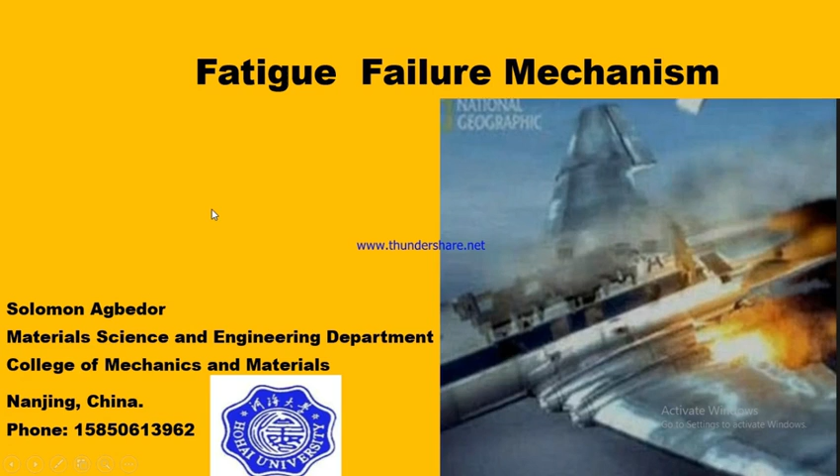Today I'll be talking about this particular topic of fatigue failure mechanisms in materials. My name is Solomon Agbedor. I'm a graduate researcher in Hohai University College of Mechanics, Department of Material Science and Engineering, China.

Today, we'll be looking at why scientists look at fatigue as a failure phenomenon, and why we have to study failure in materials. Then we'll look at the effect of fatigue compared to static loading, fatigue failure causes, and the stages of fatigue. Under this section, we'll look at crack initiation, crack growth, and the final fracture of materials or metals.

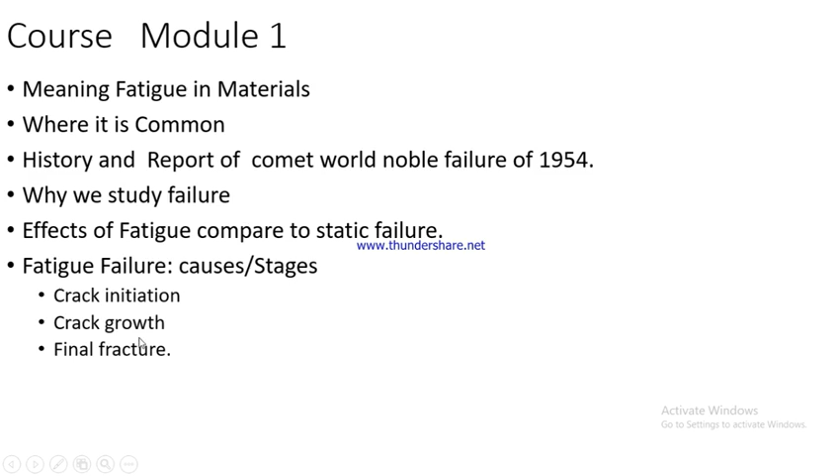Then we're talking about fatigue. When defining metallic fatigue, failure in metallic components has to do with the material being subjected to fluctuating loadings, variable loads, alternating loads, repeated loads, random or cyclic loads. All these are equal to dynamic loads that occur in materials over a long period of time, and which occur below the yield strength of that particular material, causing failure.

The places where fatigue is basically common, you can see bridges - this is a bridge now - engineering infrastructure, automobile cars, engines, and diesel or marine diesel engines too. So these are places where fatigue is basically common.

Like this bridge we are seeing here now - this is the Golden Gate Bridge - without the moving vehicles, it operates on static loads. But by the time vehicles start moving on it, it started experiencing dynamic loads, which can cause fatigue.

Like the diesel engine we also have here, the moving parts also cause dynamic loads to occur, which can also lead to fatigue. That is the movement of the pistons, then translating energies to the crankshaft, and all these combined together can also lead to fatigue.

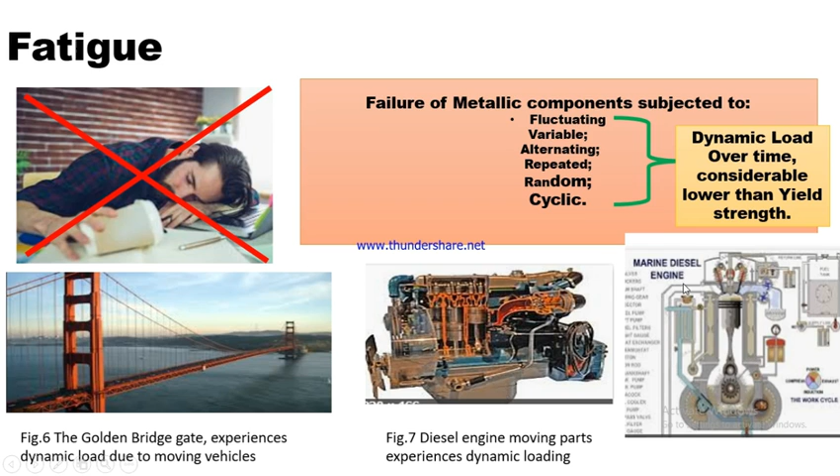Similarly, in marine diesel engines, the up and downward stroke of the piston also leads to the rotation of the crankshaft, which can lead to dynamic loads that will eventually cause fatigue to occur and failure to occur.

Now let's look at the history of fatigue. The first scientist to basically work on fatigue was Wilhelm August Julius Albert, a German mining administrator. He was the first person to propose a theory of fatigue in metals in its time.

After him, some scientists worked on fatigue, but they never took it to be so pertinent, so they treated it with little relevance in material design. But the crash of BOAC Flight 781 in 1954 actually attracted the attention of scientists and researchers to basically look at fatigue as a failure mechanism.

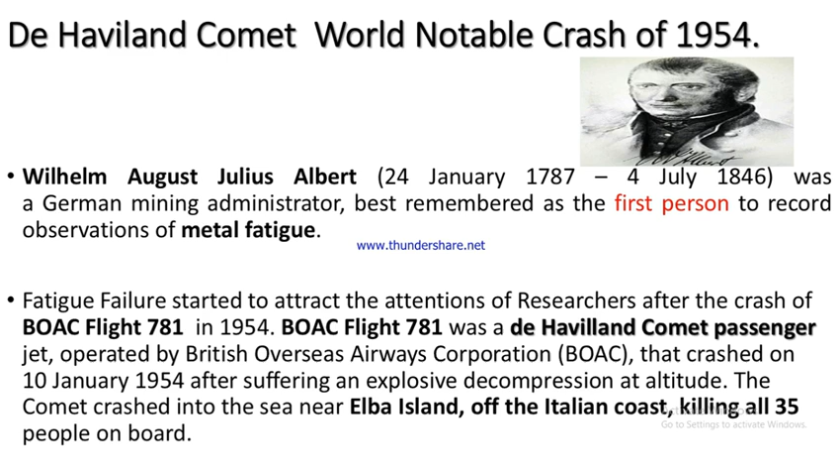This crash took place in Elba Island off the Italian coast, which killed 35 persons on board. In the next slide, I will be explaining to us the technical report of this BOAC flight in 1954, according to the way I researched it.

According to reports, the flight took place from Rome and was heading to London, at a level of 11,000 feet, which is a normal altitude in avionics. Then the plane was pressurized.

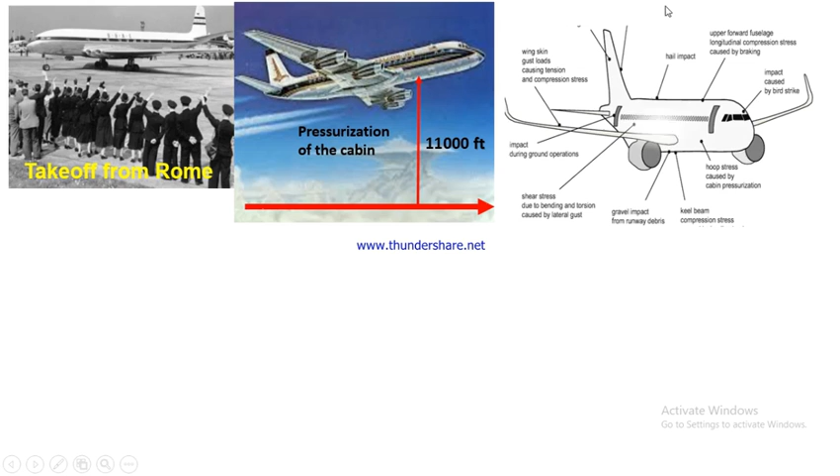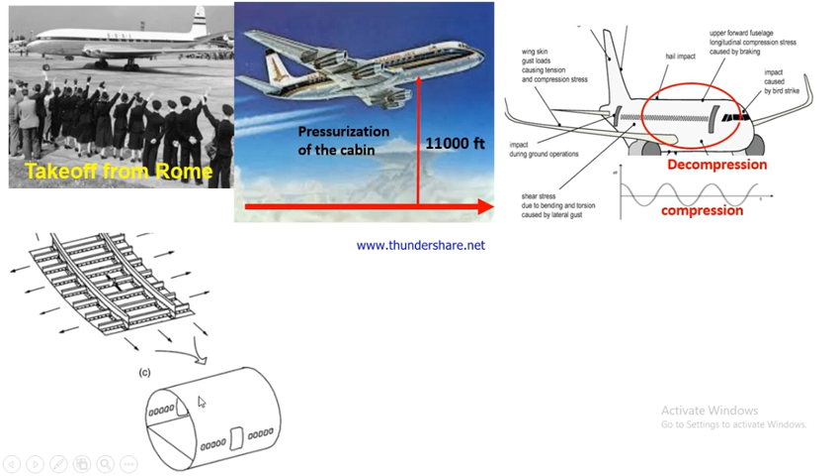This pressurization led to compression and decompression taking place at the fuselage of the aircraft, and this compression and decompression led to what we call cyclic or dynamic loading. This eventually made one of the windows undergo crack initiation and propagation that led to fracture on the fuselage, which eventually led to explosion of the aircraft, killing 35 persons on board.

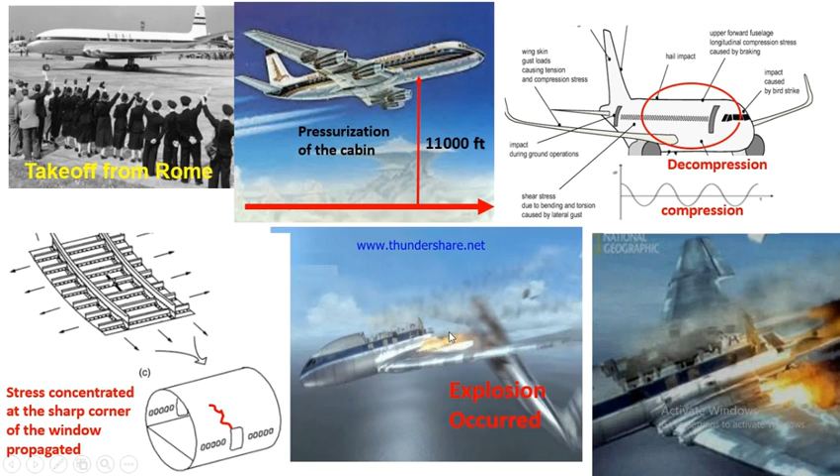After this crash, about 3 months later, another crash of the same airline took place. This actually caught the attention of scientists to look in depth at the cause of these failures in their products, and they later found out that it had to do with fatigue - that is where scientists started looking into fatigue as a mechanism.

Another big question we're supposed to ask ourselves is, why do we have to study failure? It has actually been estimated that approximately 90% of metallic failures has to do with fatigue.

And once failure occurs, it definitely leads to loss of lives, especially when lives are involved. Another part is that it also leads to reduction or stoppage of production. Once it happens in production lines, there will automatically be closure of the production lines and production systems, which will eventually have a reciprocating effect in economic losses. So these are the three important paramount reasons why failure in materials needs to be studied.

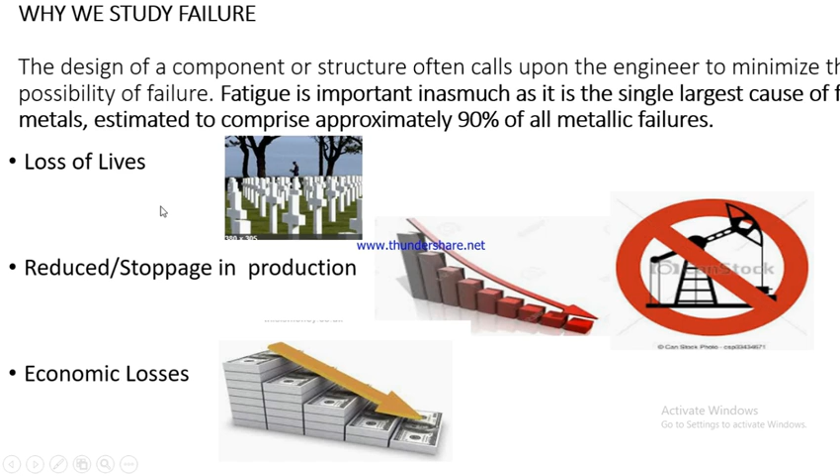Now let's look at the effect of fatigue compared to static loading or static failure. In static failure, deformation or yielding occurs, which we can see when failure is happening, and engineers can easily take cognizance and a proactive approach to it. Static loading leads to failure when materials are exploited at their yield strength, and we can easily see it occurring, giving us warning signs. We can see that the material is beginning to plastically deform, which we can easily take proactive measures to avert. So another thing about static loading is that the theory is well understood. We know definitely that if we exploit a material above or at the yield strength, it's going to plastically deform, which will eventually lead to failure or fracture of that material.

But in fatigue, it's not like that. The failure of fatigue is sudden and catastrophic. We cannot actually tell when it's going to occur. That is why the factor of fatigue has to be very carefully taken care of, especially in materials or mechanical designs. And the damage of fatigue is irreversible; we cannot reverse the damage caused by fatigue failure.

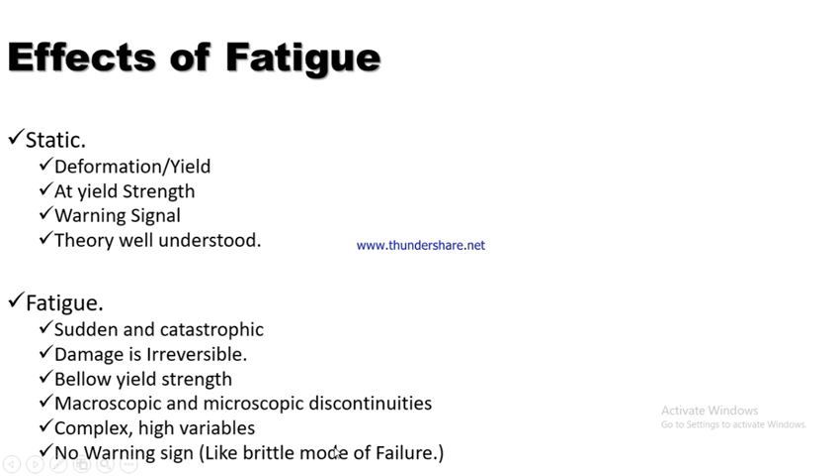We also look at the theory of fatigue being highly complex. If the theory were well understood, I believe fatigue would have been prevented from occurring in metallic materials. But because the theory is still not well understood, scientists have not come up with an idea on how to totally design against fatigue, because there's no way we can avoid fatigue in metallic components or mechanical designs. So there's no warning signal; it does not show us that it's going to occur. The failure of fatigue occurs like a brittle mode, so you will not see it, it will not show you any signal. There's no yielding, no plastic deformation. It will just occur catastrophically.

Now let's look at cyclic stresses. Like I defined, fatigue is a failure that has to do with materials or metallic components subjected to cyclic stresses or cyclic loading. The cyclic stresses could be axial stresses, or they could be flexural stresses, which has to do with bending. It could be torsional stresses, which has to do with twisting in the material, or sometimes these stresses could be in combination, with two or three of them active in the material at the same time.

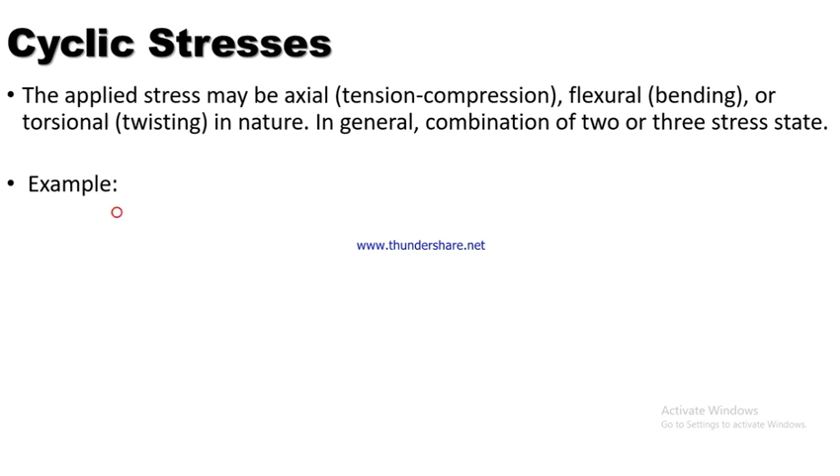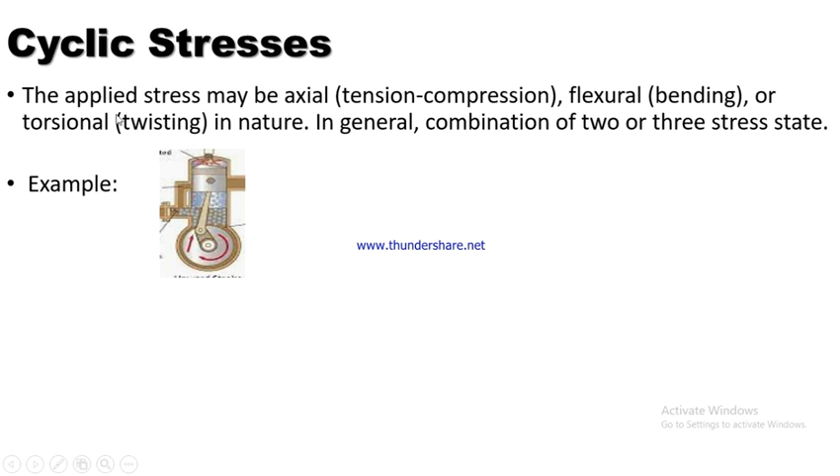So places where those cyclic stresses are highly paramount are, like I told you, the car engine or the diesel engine, whereby there is rotation of the crankshaft and the gear system. All this actually leads to cyclic stress, like what we have here now. You can see, like this one too, I will explain. Then we have the gear systems too.

The contact of gear systems can also lead to cyclic stresses. When we say the stresses are cyclic, we mean that the profile of the stresses is sinusoidal. You can see how the stresses are alternating from positive phase to negative phase over a long period of time.

That is what we mean by cyclic stresses. Let me use this diagram to explain. This is a car, and this is an automobile engine that has a crankshaft, a connecting rod, and a piston. When the rotation starts from here and begins to rotate, it comes back again to this place, and this is continuous.

So when the rotation starts from here and moves from here to here, we believe that the stresses in this material are stresses having to do with tension in the crankshaft. The stresses will be tension, which basically means they are the positive stresses occurring in this material. This crankshaft will be experiencing tensile stresses, which means they are tensional.

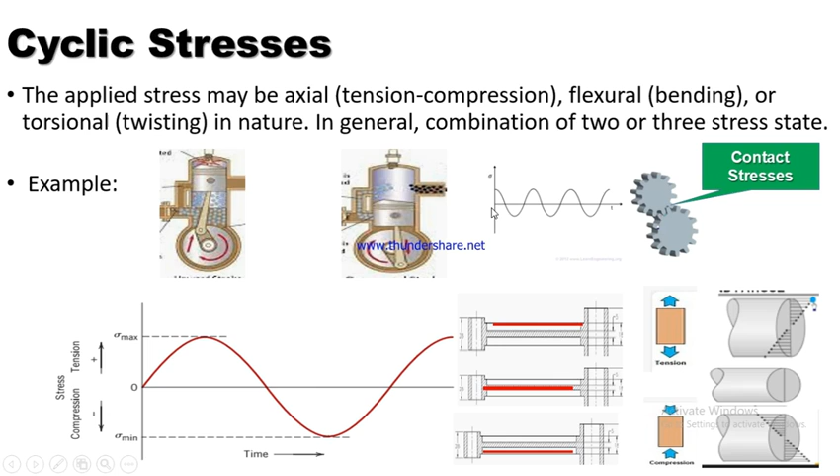That means it is a sinusoidal profile that occurs over a long period of time, which means the stresses are alternating both into positive and negative phase over a long period of time. Once this begins to occur in materials, then we have what we call fatigue.

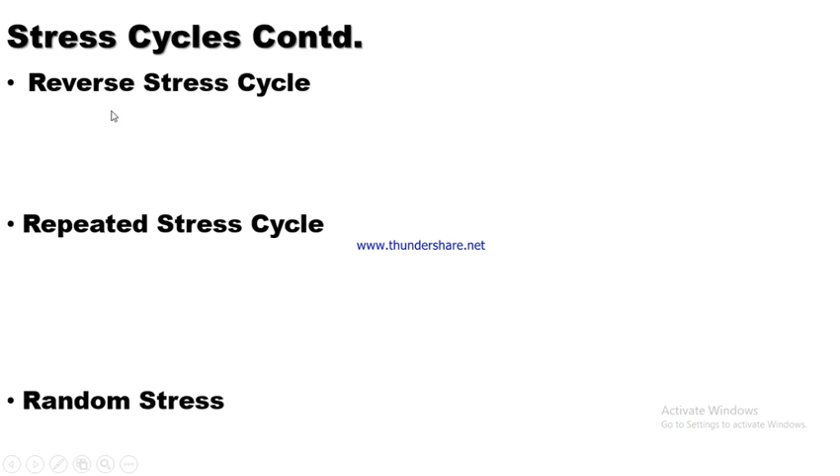Then we have types of these stresses. Sometimes we have what we call a reverse stress cycle, which has this particular diagram. When we say a reverse stress cycle in fatigue, we say that the positive and negative stresses, or the compression and tension forces, are equal, they are opposites. That is what we mean by reverse stress cycle. Reverse stress cycle always starts from the zero origin and then increases.

We also have what we call repeated stress cycle. Under repeated stress cycle, the minimum and maximum stress are asymmetric to each other, so they are not equal. And the stress never originates from zero. That is what actually leads to repeated stress cycle too.

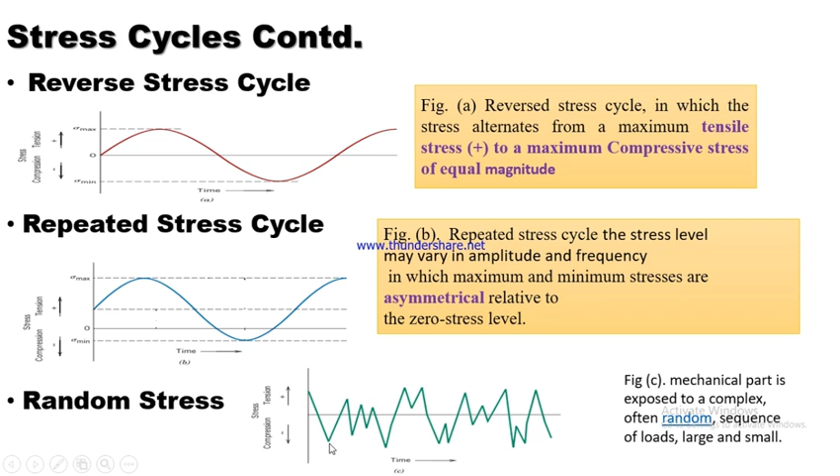We also have what we call random stress cycle, which is basically experienced in gear systems or mechanical systems. For us to resolve this dynamic random stress cycle, which has to do with multiple repetition of one phase of the stresses, we can actually resolve it into a reverse stress cycle or repeated stress cycle by using the rainflow method. For the scope of this work, that is another aspect on its own, and we are not going to look at that. The only thing I want us to understand is that it's also a type of stress cycle too.

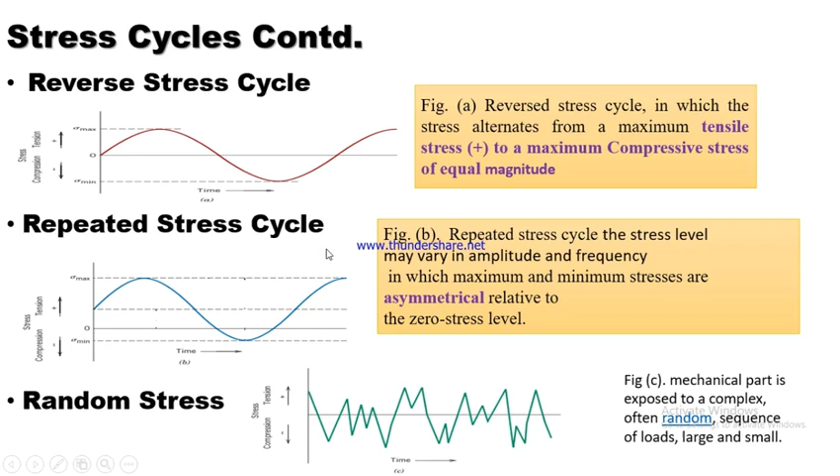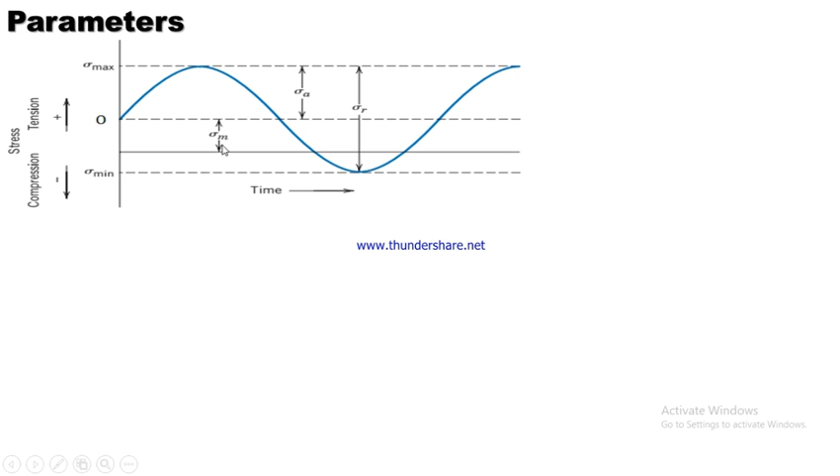When we're talking about stresses and cyclic stresses, there are some important parameters and terminology we need to get ourselves abreast with. Here we have a profile of a cyclic loading system. The first thing we need to understand is mean stress, and this is where we can locate it in the profile.

Mean stress is defined as the average of the maximum and minimum stress in the cycle. Mathematically, the mean stress is the maximum stress plus the minimum (compressive) stress, summed together and divided by 2, giving us the mean stress in the material.

Another thing we need to understand is stress range, represented by sigma r. The stress range is defined as the difference between the maximum stress and the minimum stress, which we can locate here. We subtract the minimum stress from the maximum stress to get the stress range of the cyclic stress profile. Mathematically, sigma r equals sigma max minus sigma min, and this gives us the stress range of the profile.

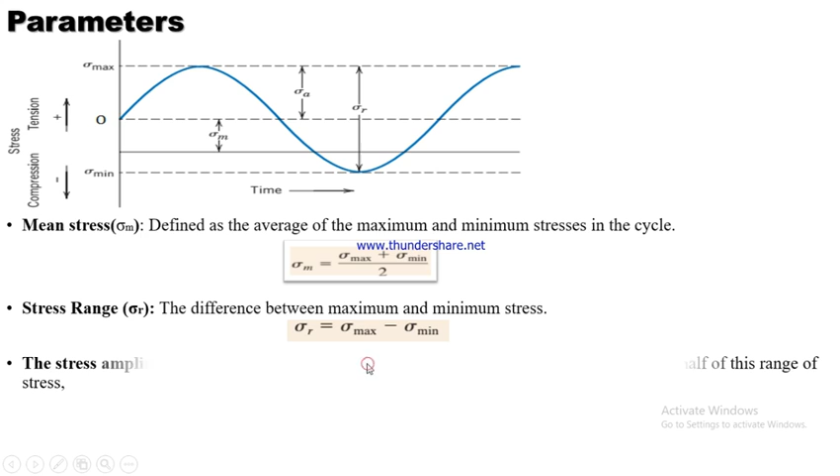Another parameter we need to know is stress amplitude. The stress amplitude is half of the stress range. Mathematically, the stress range divided by 2 gives us the stress amplitude—so half of the difference between the max stress and min stress gives us the stress amplitude.

Then we have what we call the stress ratio. The stress ratio can be defined as the ratio of the min stress to the max stress. This is represented with a capital R, and the min stress divided by the max stress gives us the stress ratio, which is represented here on the profile. All these parameters can be seen in the cyclic stress profile.

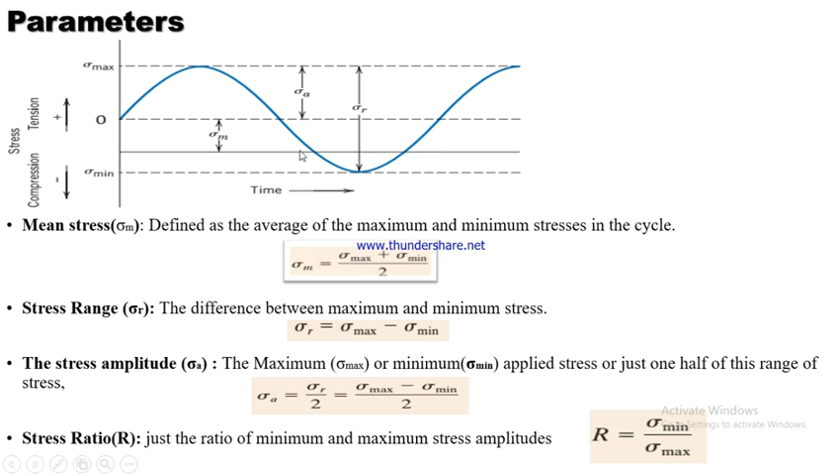Let us look at fatigue failure, the causes and the stages in fatigue. The causes of fatigue failure occur in stages. Before we can say a material has failed under fatigue, we have to look at the failure sequentially in various stages.

The first stage is crack nucleation or crack initiation, which can easily be caused by inclusions, flaws, imperfections, or voids in materials. There is no particular material free of voids or that is a perfect ideal material—all materials have flaws or imperfections. These can easily cause fatigue, even while we try to control them during the production or processing history of the material. During mechanical assembly too, we can sometimes incorporate these flaws into the materials or into the mechanical system.

It will also involve localized yielding. Localized yielding can also initiate fatigue, especially when flaws are present and the material is subjected to cyclic loading—localized yielding begins to take place.

We also have slip along boundaries, which can also initiate fatigue, especially since there are no inclusions when we try to avert inclusion in the processing history of the material, or design against them. We found that during usage of the material, or in service, when it is subjected to cyclic loading, slips begin to take place along the grain boundaries of the material, which leads to crack initiation and crack growth.

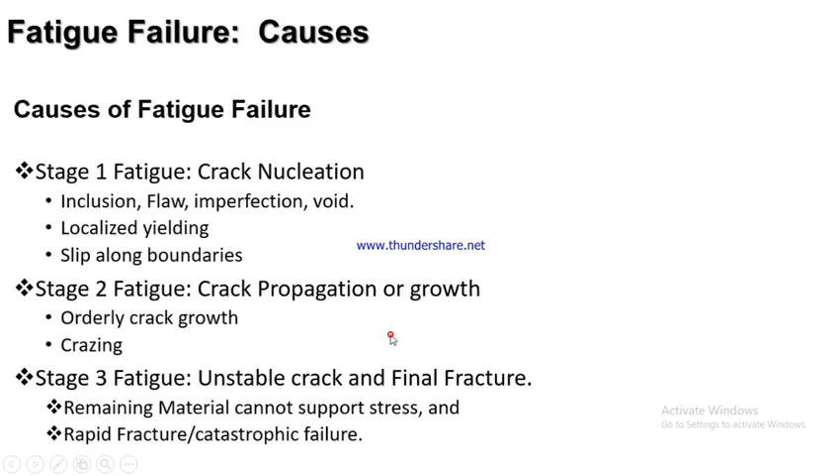Then we look at stage one, crack initiation of fatigue. Let's look at that.

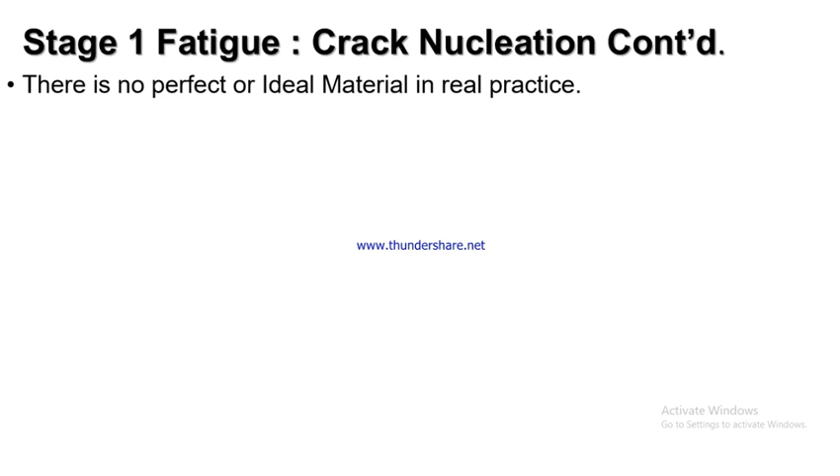Like I said, there is no ideal material, and a crack associated with fatigue failure almost always initiates or nucleates on the surface of the component at some point of stress concentration. Yes, we're going to look at that.

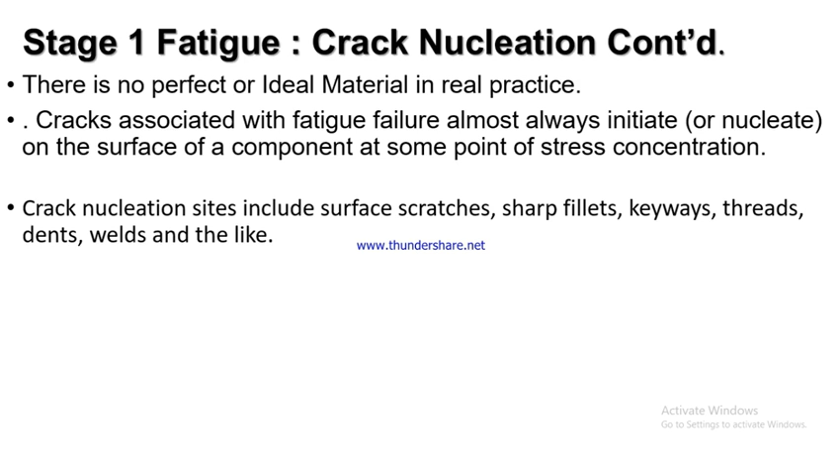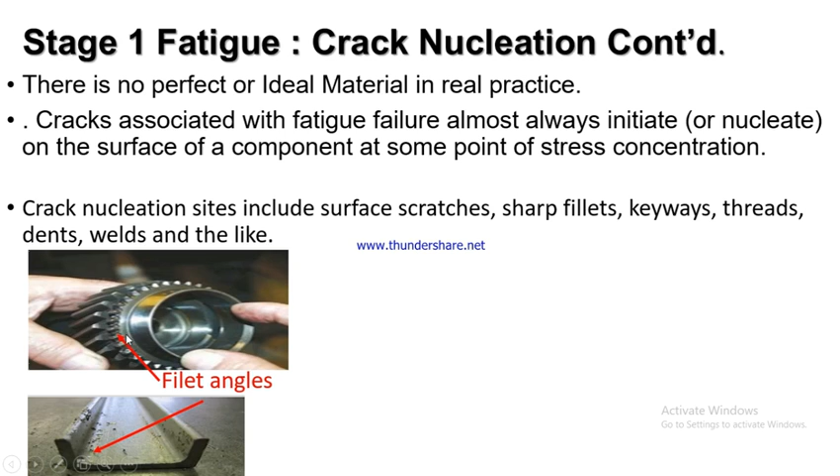We cannot have an ideal material, and sometimes when we try to avert voids or imperfections in materials during mechanical assembly, we try to put keyways or fillet systems in the material, which can actually cause stress concentration. Once those stresses are concentrated and the material is subjected to cyclic loading, the failure will begin to initiate along the stress concentration points of the material.

This is a gear system too. Crack can easily be initiated here because at these points we can have stress concentration, since these are the places where the stress will be concentrated.

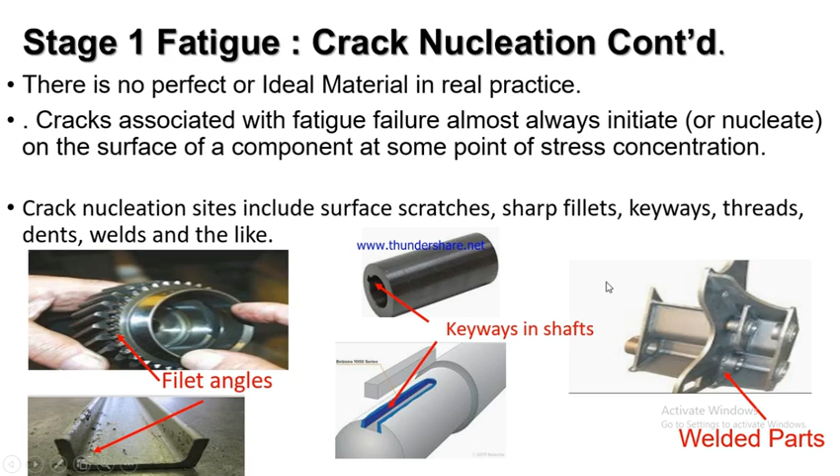We also have weld parts. You can see the places where systems or structures are welded together. We also have stress concentration at those points, which can definitely lead to fatigue crack initiation. So all these are what we call surface discontinuities in materials.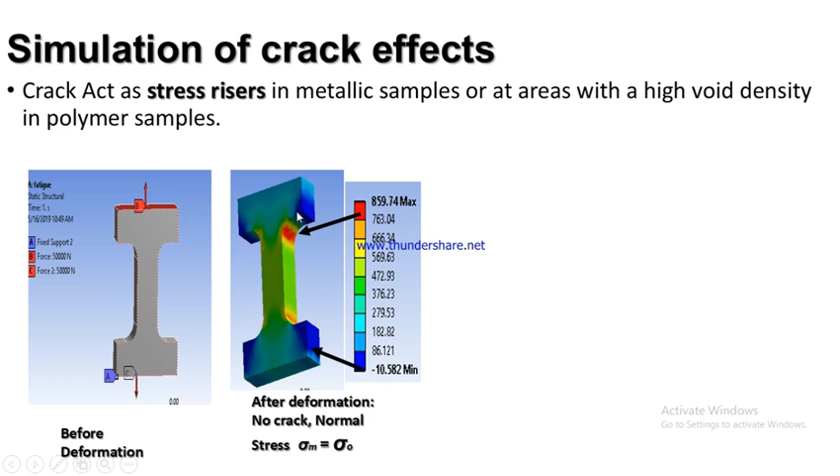But I tried to incorporate a notch into the system, and I found that the stress concentration migrated to this particular point because of the stress concentration factor. This means that the maximum stress occurring in this material now results from this stress concentration added here, which has to do with the stress concentration factor multiplied by the normal stresses attached to it, which makes the stresses here amplified.

When these materials fail, the failure will begin to start from here, because these are the places where the stress risers are located. So these are the factors of a stress riser, or stress amplifiers, in systems.

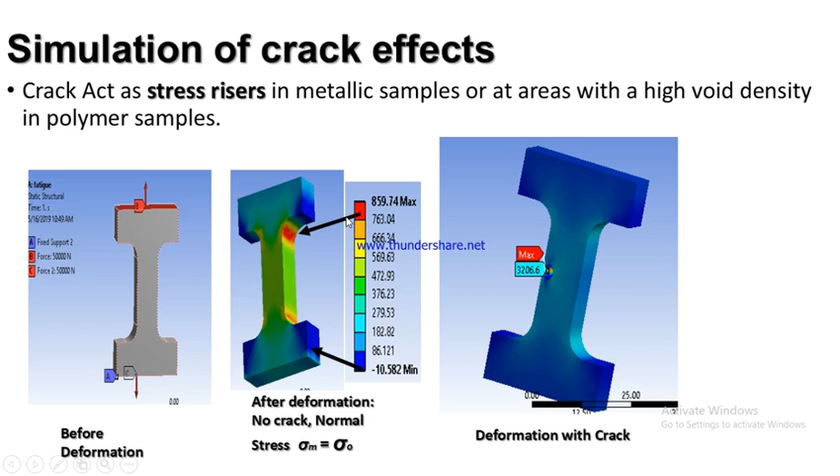Another thing I told you is that we have what we call local yielding. Once this material begins to experience dynamic loading, I want to use this diagram to explain. Once it begins to experience tension or dynamic loading, you find that local yielding begins to take place.

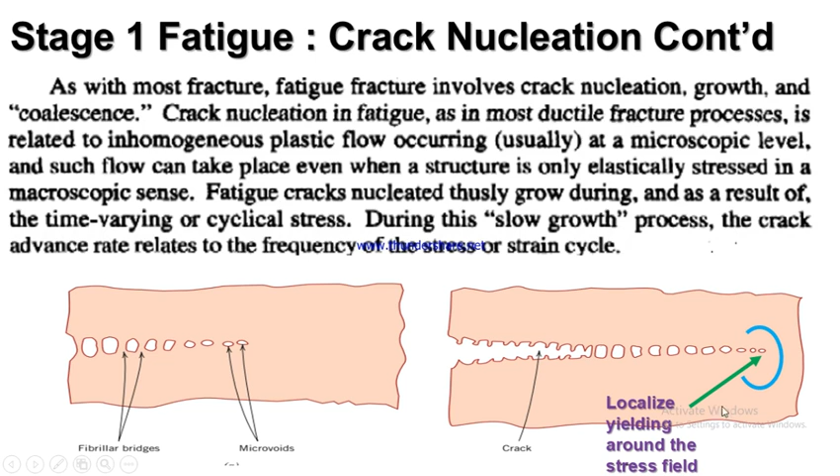I explained and put here that same coupon I simulated, and I tried to pull it in tension to see how the deformation is going to take place.

Let me play this video for you to see. As you can see, when I try to pull the coupon apart, you find that the stress... sorry, let me go back again. I want you to see that the crack can easily be initiated from here, which has stress concentration.

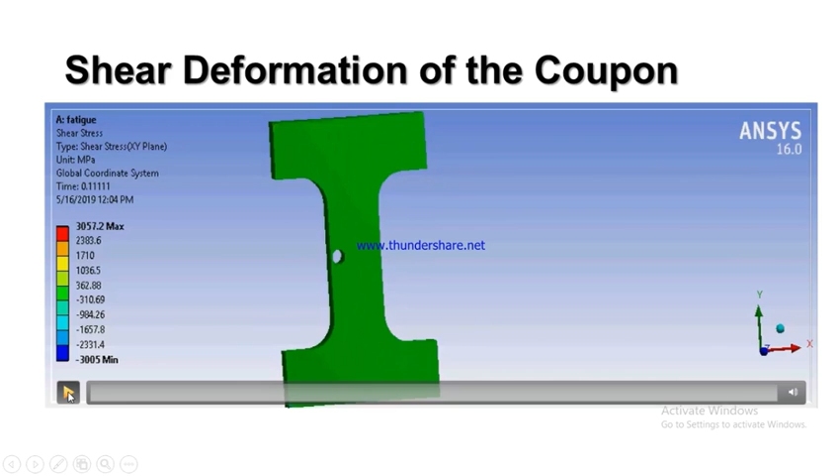So initially when we simulated this particular coupon, we found out that the stresses were basically concentrated at the fillet parts of this system, which has to do with the discontinued parts of the system. But when we now try to incorporate a notch to it, you found out all the stresses migrated to the notch, because the notch is acting as a stress riser.

Now let's look at crack nucleation. Let me go to the next slide to explain this to you. We may not have a crack initiation from an inclusion or imperfection in the material. Sometimes we have what we call persistent slip bands, which can also lead to crack initiation in the material.

It's generally accepted that the mechanism of metal fatigue is based on dislocation theory. Basically, the theory says that the atomic arrangement in crystals of a metal is imperfect and contains numerous missing atoms, and the missing atoms create gaps which cause massive stress risers too. So those dislocations that occur in the material, which can make the material plastically deform, cause stress risers or stress amplifiers in the materials too, which will definitely lead to what we call persistent slip bands.

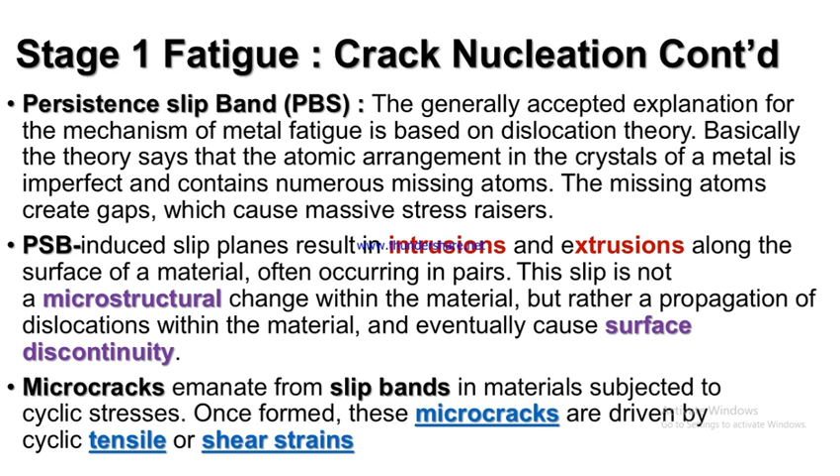This persistent slip band system induces slip planes and results in intrusion and extrusion along the surface of the material, which will lead to slip banding. We have microcracks that begin to emanate from the slip band system, which will lead to crack propagation. Crack propagation will definitely lead to rapid fracture, and we say that the material has failed under fatigue.

Let me explain with these diagrams that are here. We have what we call dynamic loading. This is a cyclic or dynamic loading. As it begins to occur in this particular material, the dislocations in the material will experience microplasticity. This microplasticity basically starts at the surface of the material, sometimes due to scratches on the surface, or there may not be scratches.

So when these dynamic loads take place over a long period of time, this will lead to microplasticity starting to take place. And this microplasticity will definitely lead to slip occurring at the surface, which you can see here.

As the stress increases, we definitely will have more slip bands begin to incorporate into the system. These are the slip bands, you can see them here. As you begin to increase the stresses on the system over a long period of time, more slip bands are increasing, and by doing so you begin to see that there will be a surface discontinuity. You can see the surface not being uniform.

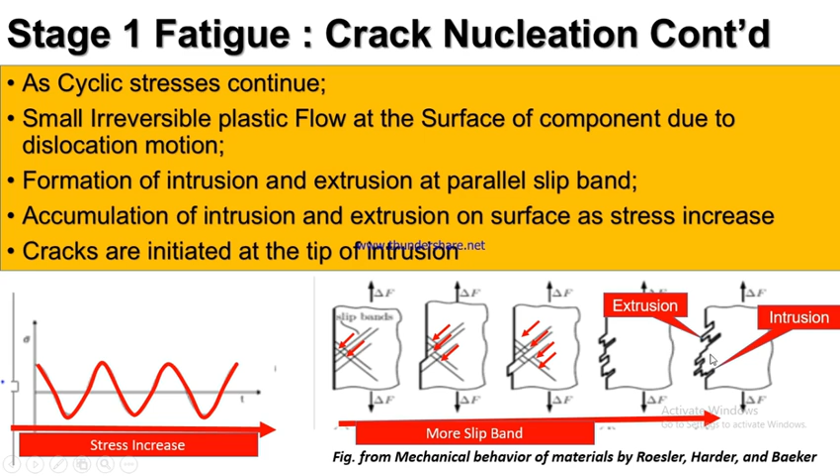At this point where the slip bands have now increased, you can see that there is a discontinuity at the surface of the material. As this continues to take place, we begin to see more slip bands taking place, and you can see there's a protrusion coming from the surface of the material. By doing so, we begin to have what we call surface intrusion and surface extrusion.

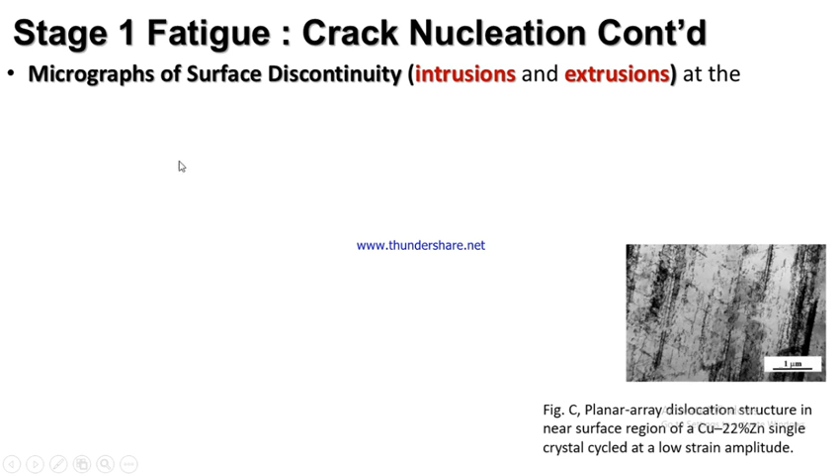We also use a micrograph to explain this to us. Let me put the micrographs here. Like we have here, you can see this is a micrograph showing an intrusion and extrusion taking place. This is an extrusion at the surface of the material, and this is an intrusion.

These are dislocations occurring in the material. These dislocations lead to slip bands taking place, like I explained in the previous slide. This is another micrograph too, showing an SEM image of slip bands. You can see this is a PSB, and this particular part is called intrusion. The part that goes inside is an intrusion, then the part that protrudes out is called an extrusion.

So all these can occur at the microscopic level. All this will lead to micro cracks being initiated.

When this particular material is subjected to cyclic loading over a long period of time, you begin to see cracks start to propagate.

This is also an inclusion in materials, which can also cause fatigue. This is due to imperfection in the material. These are particles in materials.

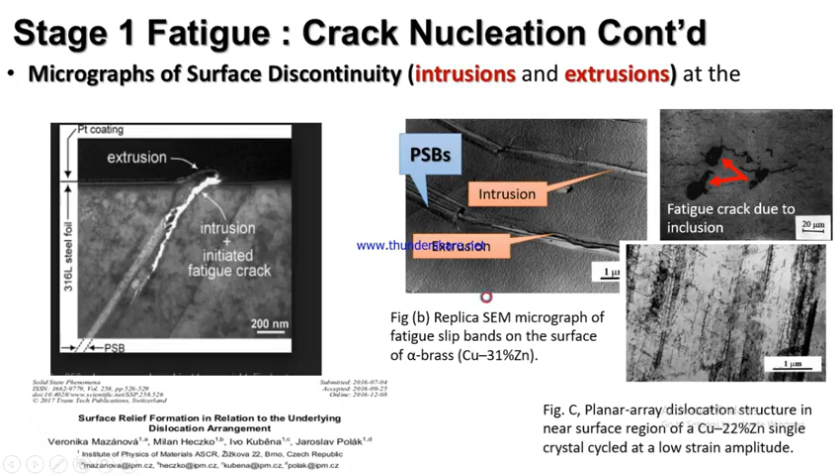Now let's go to stage 2 fatigue, which has to do with crack propagation and crack growth. Like we said before, once those cracks are initiated, for them to propagate or try to grow, there are other mechanisms associated with them.

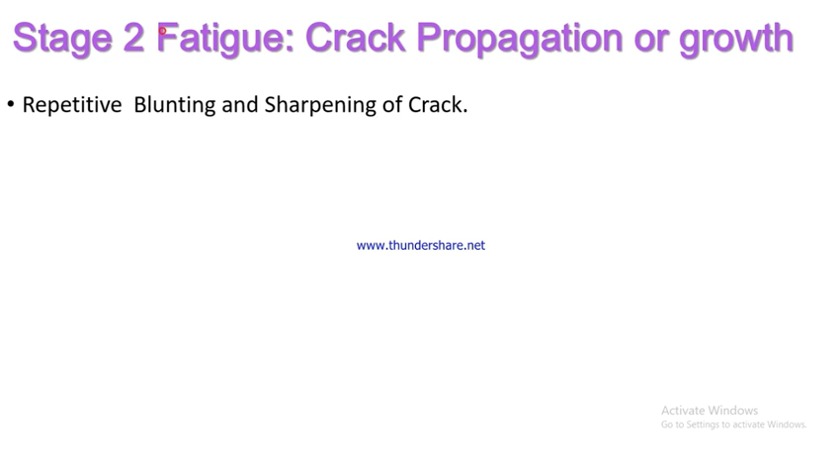The first part is what we call crack opening, which has to do with repeated blunting and sharpening of the cracks, which makes the cracks propagate and grow.

The first part is what we call crack opening, or tensile loading. When the cracks begin to be under tension, and the material begins to experience tension, the slip system begins to develop.

You can see slip bands develop along the crack tips, here. The crack tips and the slip system begin to increase, and with further loading, the crack tips begin to blunt.

Once you begin to open more, pulling the system apart under tension, the crack tip will begin to blunt, which is shown here.

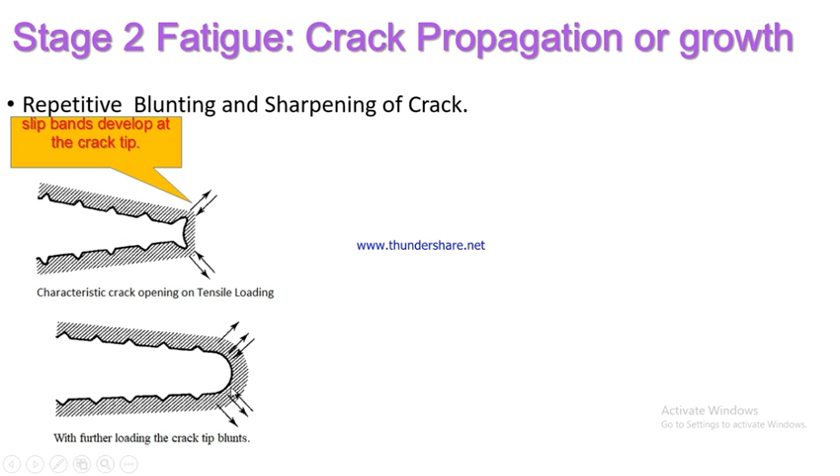Under compression, as you try to compress it again, which has to do with the dynamic loading, you find the cracks begin to sharpen again, and the slip bands projecting from the surface of the cracks begin to reverse back to the surface.

All this makes the cracks grow and tear more and more. Then the slip bands reverse back again, and those that went in begin to go out.

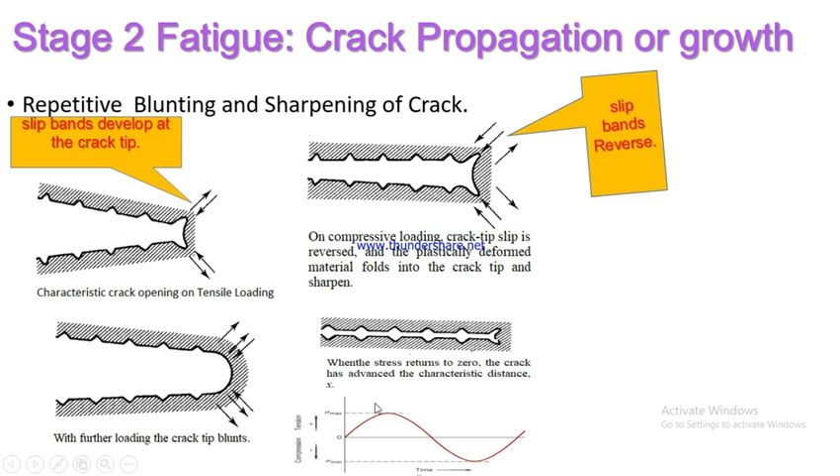All this crack blunting and sharpening causes beach markings, which we call beach marking striations.

Microscopically we call them striations, but when we can see them with our eyes, under a microscope or otherwise, we call them beach markings. For one beach mark to occur in a material, it's a projection from here to here.

This projection results from one complete cycle of loading, or when a particular machine completes an operation over a long period of time. When it completes a single operation over a long period, that is when a beach mark will occur in the material.

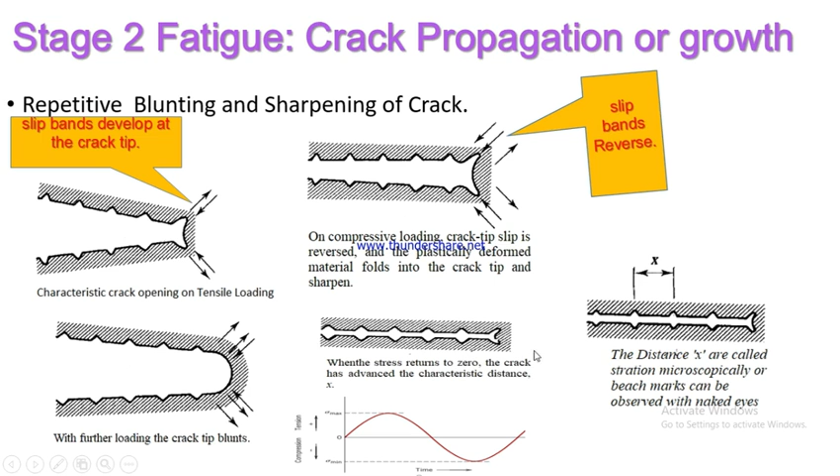Stage 2 continues. Let's talk about this beach mark. The region of the fracture surface that formed during the crack propagation step may be characterized by two types of marks, called beach marks or striations.

When you look at the surface of a material fracture under fatigue, you can see the ridges. These ridges are called what?

Beach marks, especially when you can see them with your naked eyes without any aid system—this is a beach mark. But when you require microscopes to look at them, we call them striations.

So these markings are found in a component that experienced an interruption during the crack propagation stage.

An example is a machine that operates only during normal working shift hours. When a machine works over a long period of time for a complete operation, it will lead to a single beach mark occurring. This fatigue loading occurs over a very long period of time, and that is when we can say a material fails under fatigue.

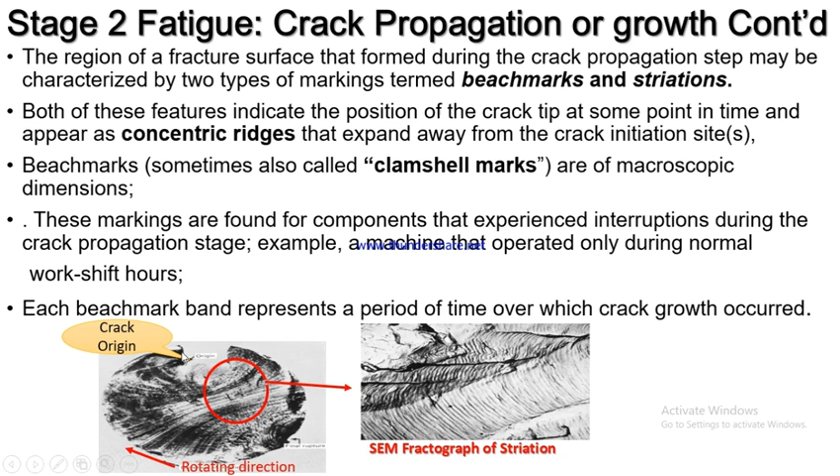This is a particular crankshaft. Here you can see the crankshaft. I believe the rotation of the crankshaft is in this direction, and the crack actually initiated or originated from this place. Once the crack originated from here, it began to propagate towards this place, and finally the final fracture took place at this particular zone. In the other part of this slide, I will explain how final fracture and rapid fracture help us know where cracks initiated in materials.

The fatigue crack growth rate: for us to understand the science behind this crack growth, we need to understand a fundamental theory. We study this under fracture mechanics of materials. From our previous knowledge of fracture mechanics, I'm going to borrow concepts we're already exposed to regarding crack growth rates.

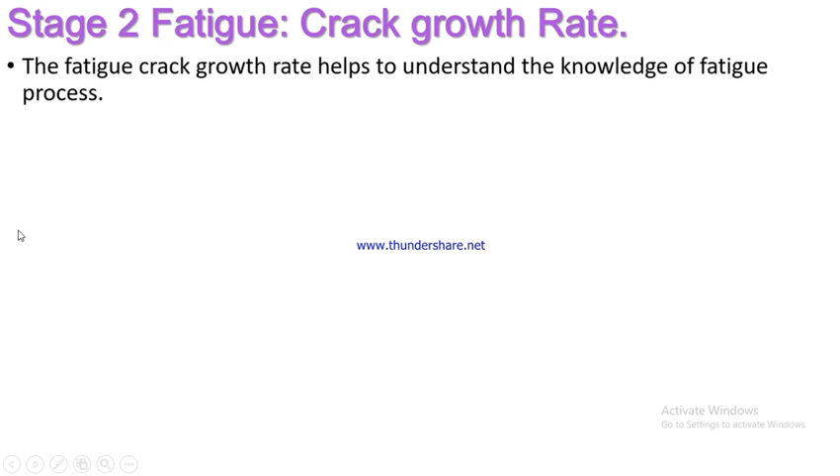The fatigue crack growth rate helps us understand the fatigue process. Crack growth rate can also be used to predict the material's fracture toughness. So let's look at how we go about this.

A sample is subjected to a fixed stress or strain amplitude at a specific stress ratio, and finally the crack length C is measured microscopically. Then we plot the crack length versus the number of stress cycles to failure, which will show us the crack growth rate.

Diagrammatically, this is what we are talking about. When you pick a particular sample of material, design it, and subject it to a fixed stress over a long period of time, the stress will definitely cause the crack in the material to grow. Once you measure the length of the growth, denoted as C, against the number of cycles the material was subjected to before failure, and plot them together, we get a profile like this.

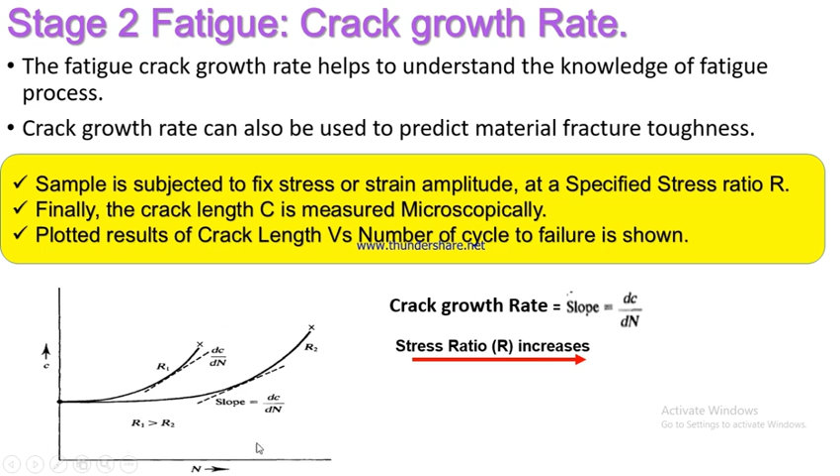The differentiation of this curve, the slope of the curve, is called the crack growth rate. As I explained earlier regarding the meaning of stress ratio, as the stress ratio increases in the material, the crack growth rate also increases. That is what this profile tells us.

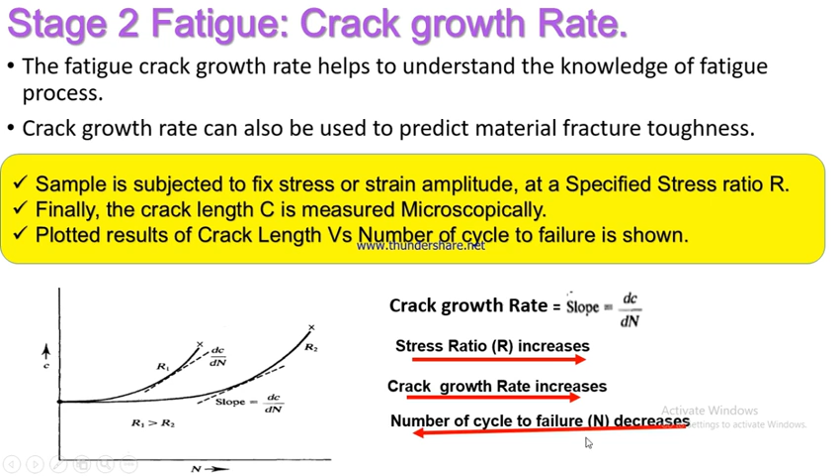The number of stress cycles to failure will decrease as the stress ratio increases. So the crack growth rate is also increasing, while the number of cycles to failure is definitely decreasing.

The scientist who worked on relating crack growth rate with stress intensity factor is known for Paris' Law. He was a fracture mechanics engineer and scientist who did a lot of work in fracture mechanics on how to relate crack growth rate with stress intensity factor.

From Paris' Law in 1961, based on fracture mechanics, it was suggested that the rate of crack growth can be characterized using the stress intensity factor of the material. These are the various stages of the previous crack growth rate profile graph. If we plot it against the stress intensity factor of the material, we get a particular profile that looks like this.

The slope, dC over dN, is proportional to the range of stress intensity factor raised to the power of m, where m is an empirical constant between 2 and 7, which we can select, and A is a constant that depends on the material and the stress ratio of the material that we are investigating.

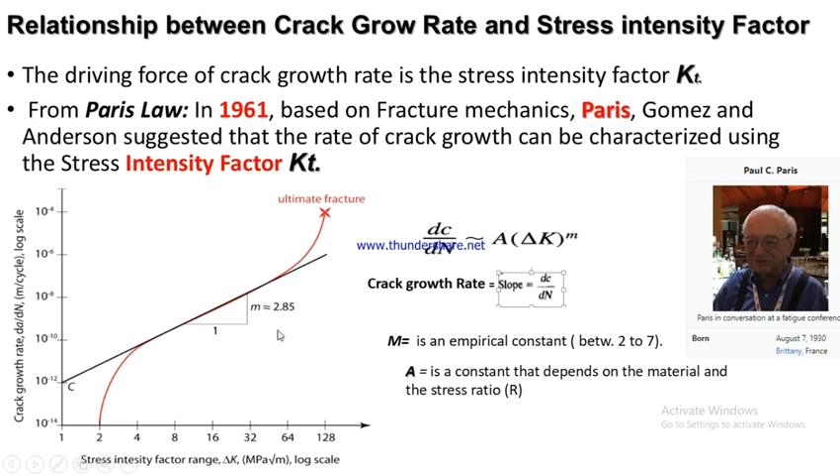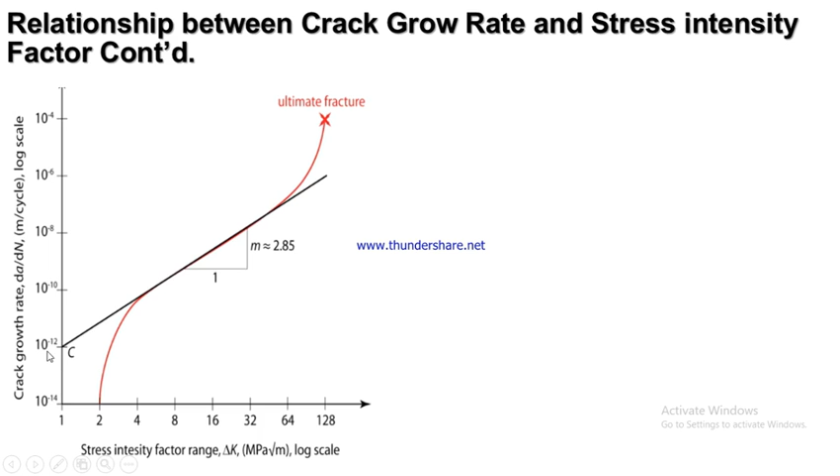Let me explain the profile of crack growth rate versus stress intensity factor. The graph is divided into 3 regions: region 1, which is this one, region 2, which is this place, and region 3, which is this particular place. In region 1, at a very low stress intensity factor range, we have what is quite low at this particular place.

The stress intensity factor range is very low at stage 1, which is basically here. You can see we're starting from 1 to 4.

There is a particular threshold of stress intensity factor such that when the crack in the material is below this threshold, there is no amount of cycles that can cause fatigue, and that material can never fail by fatigue. If the crack is below the stress intensity factor, between this particular region and this particular region in the material, there is no amount of cycle that can cause fatigue in that material. All of this happens in region 1 of the material.

Another thing we need to understand is that the crack growth rate is sensitive to the stress ratio of the material at this stage 1. It's only here that the crack growth rate is very sensitive to the stress ratio of the material.

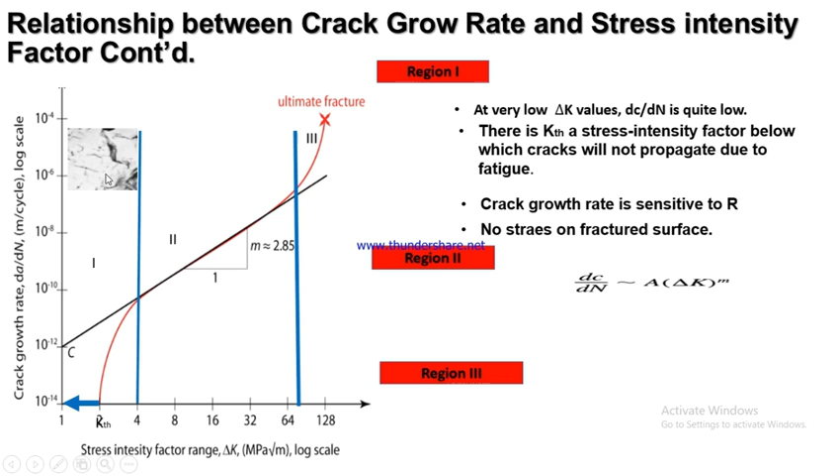At this particular point, you will not see any striation on the fracture surface of the material, especially where the crack initiated, which is region 1 of the crack growth rate profile.

In region 2, which is this particular place, the relationship becomes the Paris law, which becomes linear, and the crack depends on the power factor m, which you can see from here. That's why you can easily measure the slope of this particular region, because it has a linear behavior that depends on this power of m.

Another thing to understand in region 2 is that we have less sensitivity to the stress ratio. The stress ratio is not basically prominent in this particular region of the crack growth rate versus stress intensity factor profile.

In this particular region, this is where we have what we call striation. You can easily see striations begin to occur in the material here. So when striations occur, you know that the material has passed the threshold stress intensity factor, and it's now in region 2 of the profile.

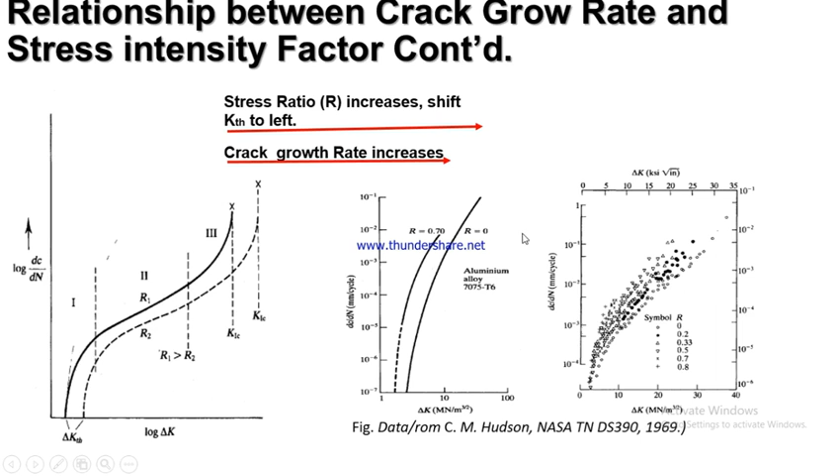From this profile too, we also know that the fracture toughness of the material decreases. As we increase the stress ratio, you can see this fracture toughness decreases.

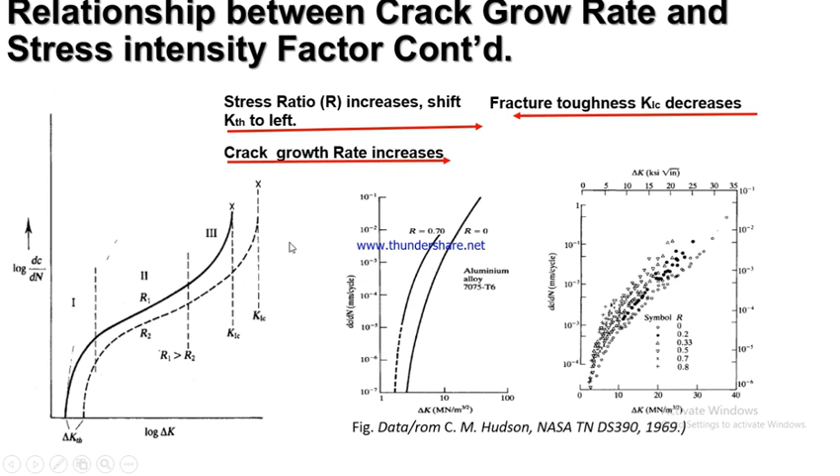There's something I'm supposed to explain from the previous chapter. Why we say that the stress intensity factor and crack growth rate can actually be used to determine the fracture toughness of the material is this: especially after you have exploited the material all through this profile to this particular final fracture point, we can see that the ultimate fracture in the material occurs when the maximum stress intensity factor is equal to the fracture toughness of the material.

So when the fracture toughness of the material equals the maximum stress intensity factor range, the material will definitely fracture. At that particular point, the strength of the material will not be able to withstand the cyclic stresses on the material.

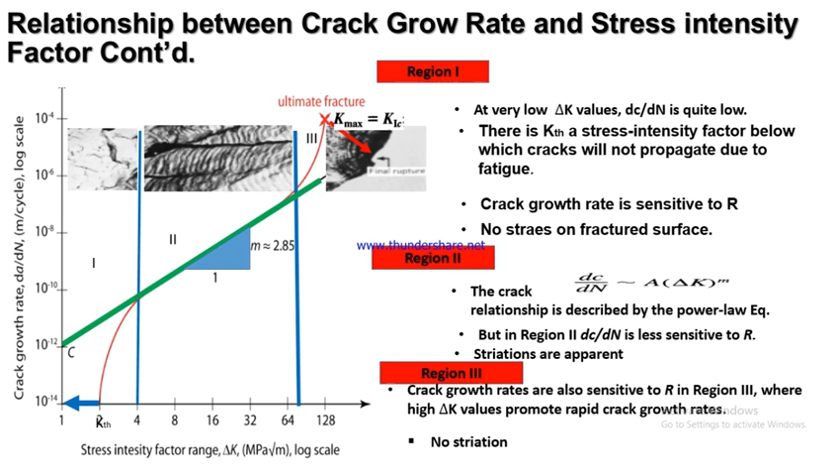I forgot to explain this. The third part, stage 3 of crack fatigue, is the final fracture of the material. There is an uncontrollable and rapid extension of the crack within the component, especially when it has propagated to the point where the stress intensity factor equals the fracture toughness of the material. In stage 3 of fatigue, we see an uncontrollable extension of the crack, which we've already explained using the profile of crack growth rate versus stress intensity factor according to Paris law.

You can see from this fracture surface of the material that at this particular place, like I told you, there is no striation occurring at the surface. You can see the crack initiated from this particular place, and finally this is where the region of rapid crack propagation, or rapid failure, occurs, and the final fracture took place at this zone. You can see there's no striation here.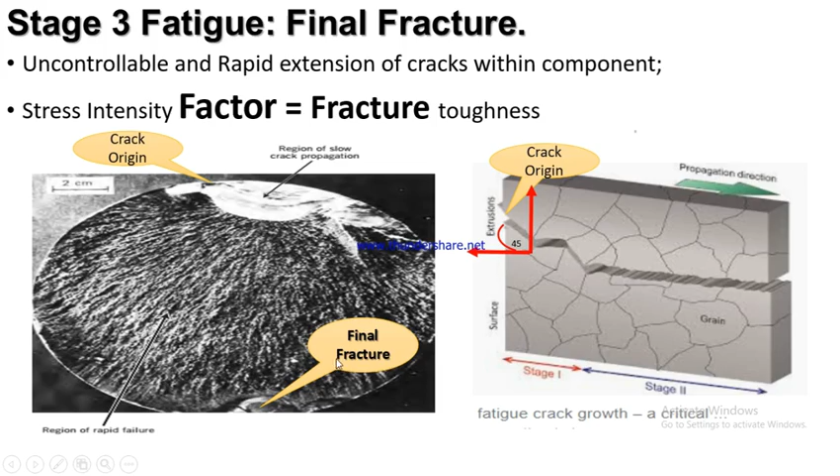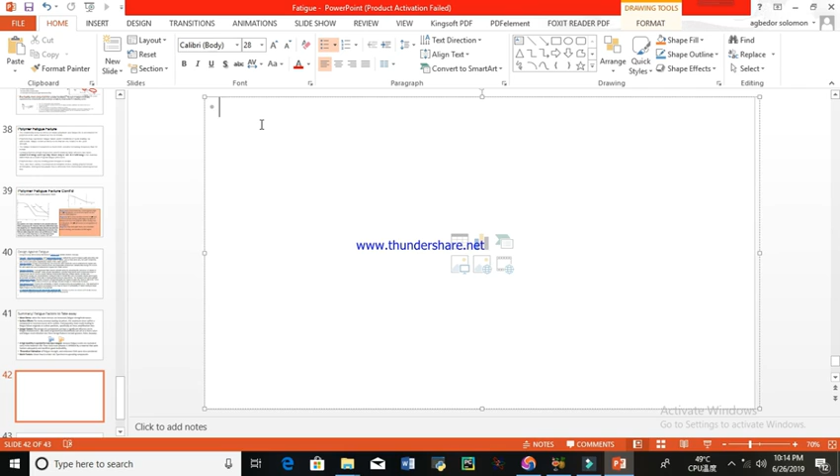Let's do a conclusion, a review of what we've learned so far. In the course of this presentation, I was able to let us know the meaning of fatigue.

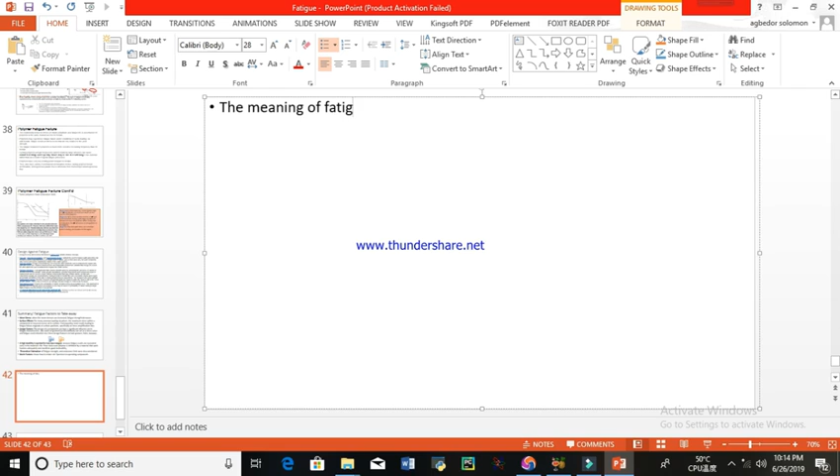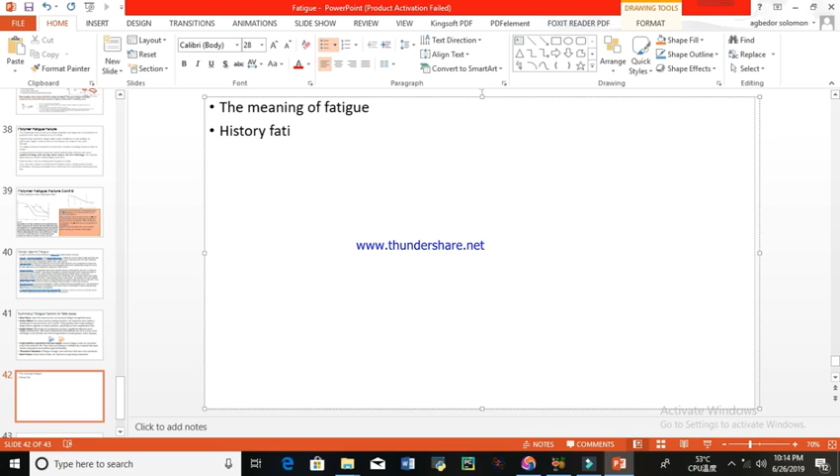We also looked at the history of fatigue, and why scientists decided to take cognizance of fatigue. We looked at how fatigue is initiated in materials, fatigue initiation, and crack growth.

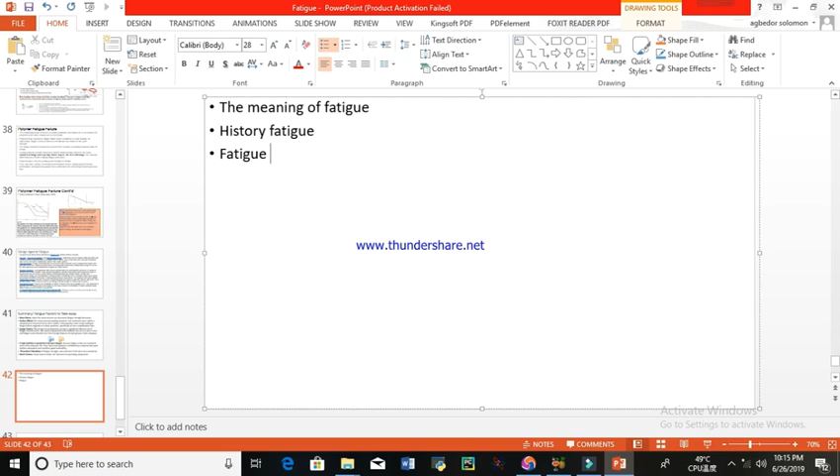We looked at how fatigue starts, then how we can authoritatively say a material failed under fatigue. Finally, we also looked at the features of materials that fail under fatigue.

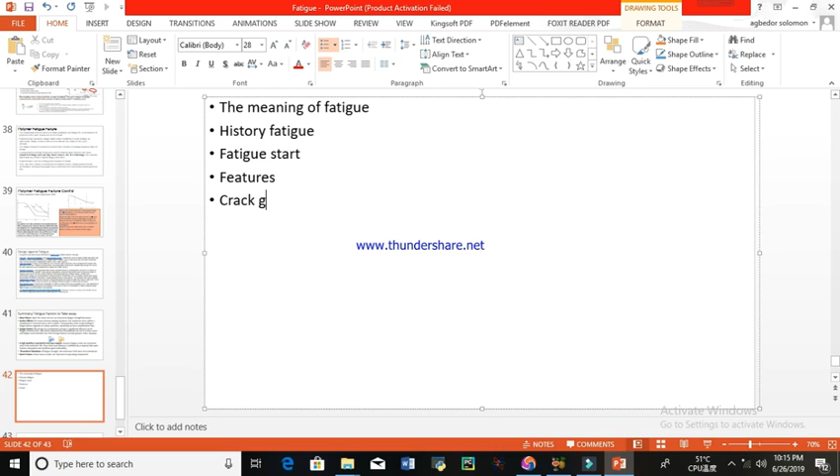We also looked at crack growth rate and how we can authoritatively use it to ascertain the fracture toughness of a material. Finally, we looked at the final fracture of a material that fails under fatigue. So thank you for watching.

In the next module, I will be talking about how we can design against fatigue using a theoretical method, then comparing our results with experimental data. In case we don't want to perform experiments or fatigue tests, we can use theoretical means and relevant models to design against fatigue, and then use those models and results to minimize the occurrence of fatigue in mechanical designs and materials.